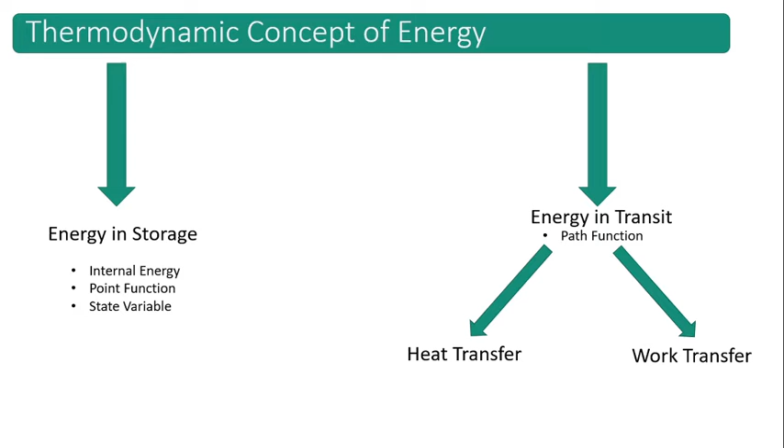Heat transfer means the kind of energy in transit by virtue of temperature difference, and it flows in the direction of the negative temperature gradient, meaning from high temperature to low temperature. All other forms of energy transfer are work transfer. So the various types of work transfer in thermodynamics are displacement or PdV work, paddle wheel work, flow work, and shaft work.

Displacement work means work done by the displacement of the system boundary. This is associated with the closed system, and there is no restriction whether its volume will be fixed or not. The system boundary can either expand or collapse. Because of the displacement of the system boundary containing a fixed mass, the work transfer which takes place with its surroundings is the displacement work.

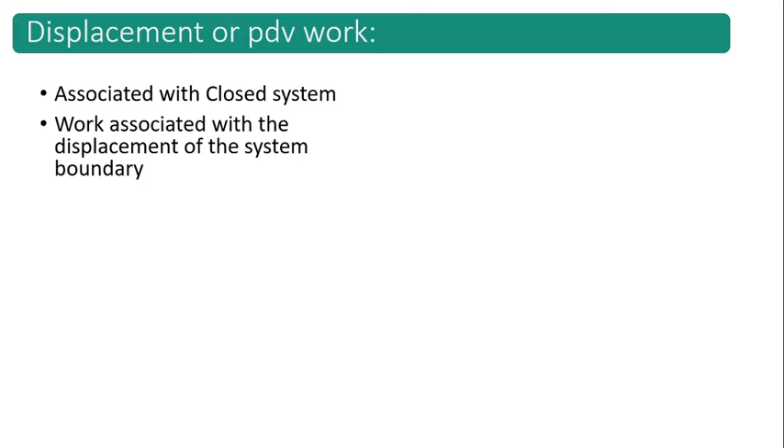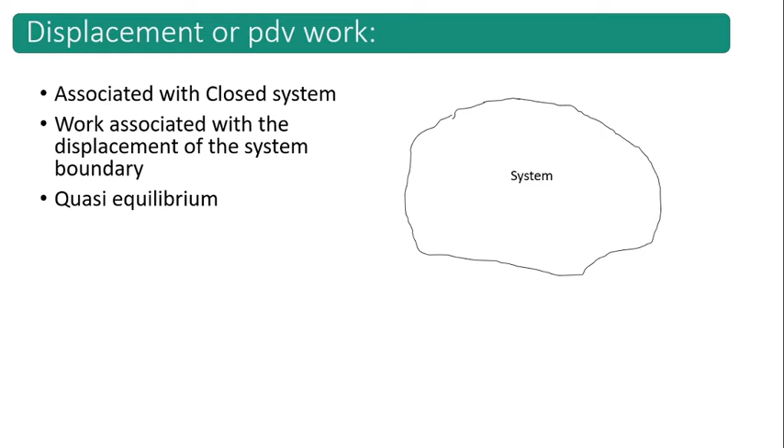But there is a specific theme in between. Displacement work specifically implies the work due to the displacement of the system boundary in a quasi-equilibrium process. That means the system has to expand or collapse slowly through infinite equilibrium states. So if we consider this as a system, P is the internal pressure of the system and Pex we can consider as the external pressure to the system.

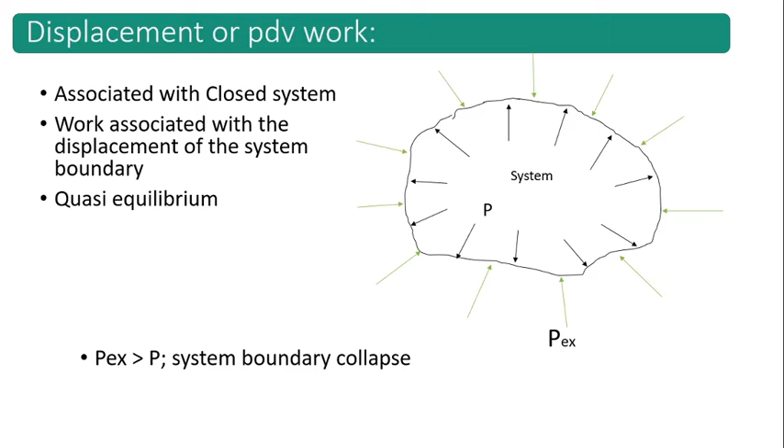From the figure it is clear that if Pex, the external pressure, is greater than P, the internal pressure of the system, then the system boundary will collapse. And if P is greater than Pex, that is the internal pressure of the system is more than the external pressure, the system boundary will expand.

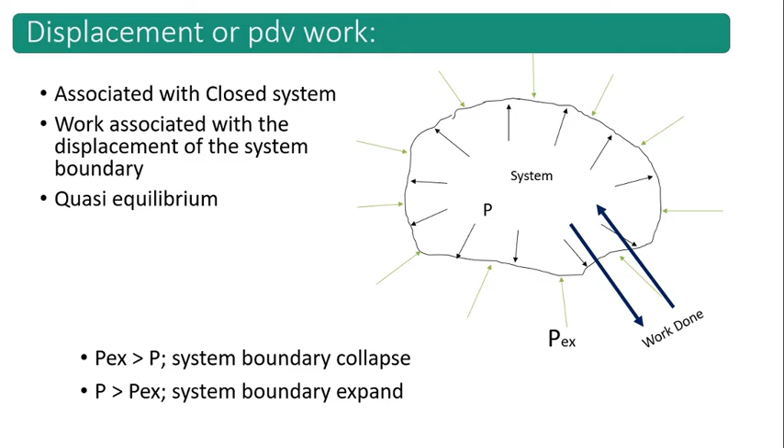So during expansion and collapse, the system boundary will move, or displacement of the system boundary will take place, due to which there will be work done, that is displacement work. So why is this displacement work termed PdV work? Let's see. If we consider a piston cylinder arrangement, in the initial state the pressure and the volume of the gas are P1 and V1.

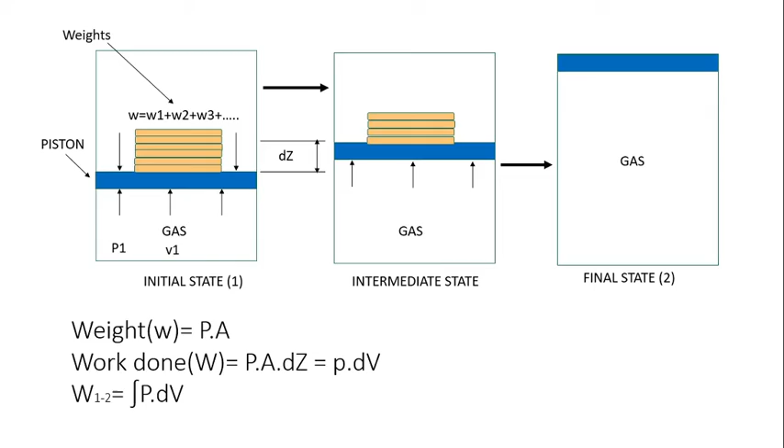2. So we can say that the weight W is nothing but pressure into area. So the work done can be said that W equals P into A into dz. It is clear in the picture that dz is nothing but the displacement of the piston due to the removal of weight. So the work done is now P into A into dz, which is P into dV, that is the pressure into displacement volume. So the entire work done from the initial state to the final state is W12, and that is the integration of PdV.

If m is the mass of the weight lowered through a distance dz and T is the torque transmitted by the shaft in rotating through an angle d theta, the differential work transfer to the fluid is given by dW equals mg dz, which equals T d theta. And then the total work transfer is W equals integration from 1 to 2 of mg dz, which is integration of T d theta.

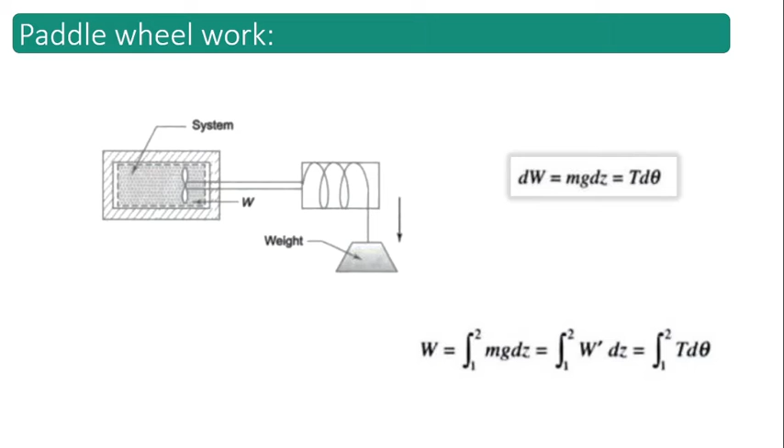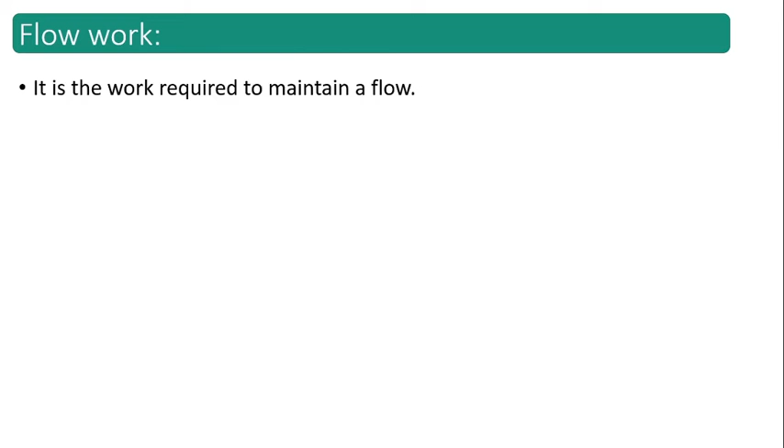Now we come to the flow work. Flow work is significant only in a flow process or an open system. It represents the energy transferred across the system boundary as a result of the energy imparted to the fluid by a pump, blower or compressor to make the fluid flow across the control volume. So it is basically the work required to maintain the continuous flow, and it is associated with the control volume.

So here in the picture we can see a control volume, with an inlet portion and an outlet portion, and there is an imaginary piston. If the fluid goes through the inlet portion, there will be a force acting on the piston and the piston will move to the right hand side for a displacement of L. The pressure exerted on the piston is P, the mass of fluid is M, and the volume is V.

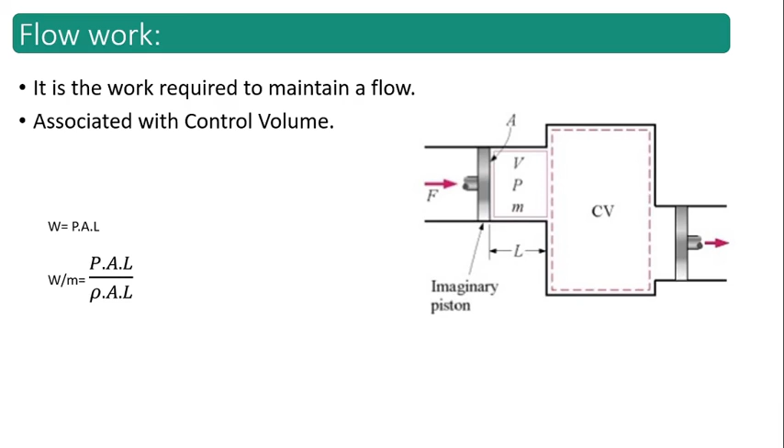So the work done equals pressure into area into the displacement length L. In case of flow work we mention this as work done per unit mass of fluid. So we have written W by M, work done per unit mass of fluid, equals PAL by rho AL, where rho is the density of the fluid. After cancelling out area and length we get P by rho, which is termed P into small v. Here small v is the specific volume of the particular fluid.

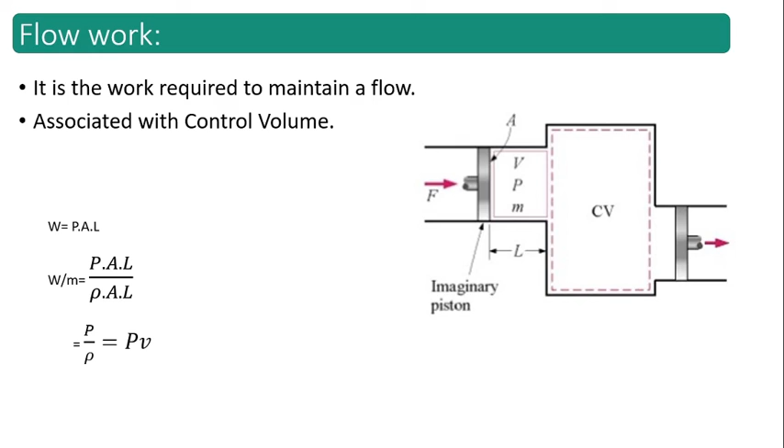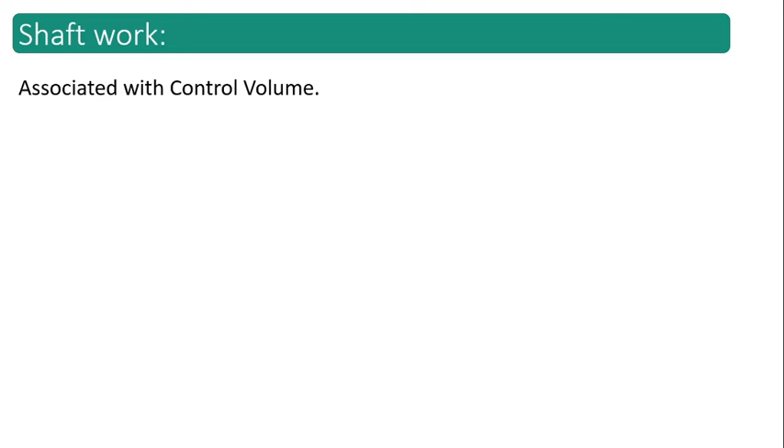Next is shaft work. Shaft work is also associated with the control volume. From the picture we can see that when a shaft, taken as a system, is rotated by a motor, there is work transfer into the system, because the shaft can rotate a pulley which can raise a weight.

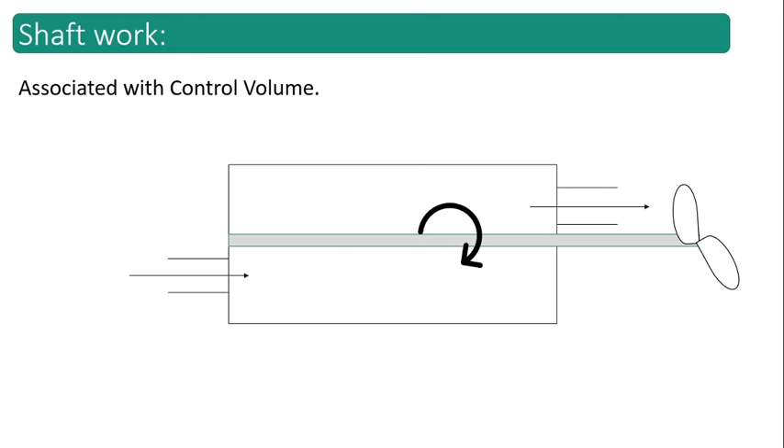So if T is the torque applied to the shaft and d theta is the angular displacement of the shaft, then the shaft work is W equals integration of T d theta. And the shaft power is T d theta by d tau, which equals T omega, where omega is the angular velocity and T is considered constant in this case.